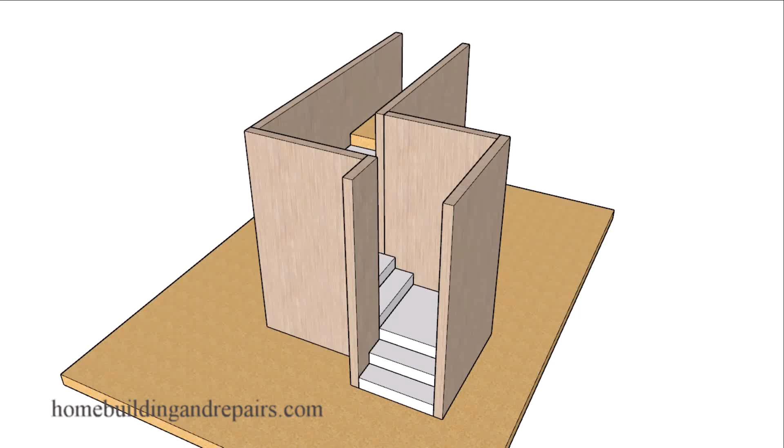In this video, I will provide you with a way that you might be able to use to figure out the overall total rise in a stairway that you cannot just simply grab a measuring tape and measure from the upper level to the lower level, because you might have other obstacles in the way preventing it. So let's go ahead and jump into this.

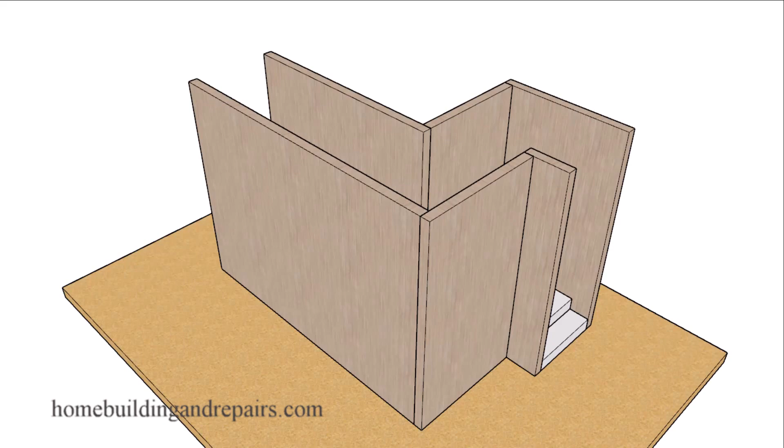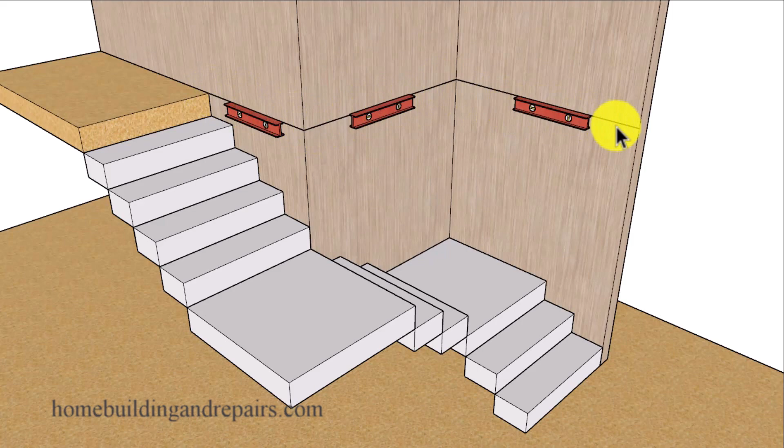The first thing you can do will be to simply grab a level and draw some level lines around the walls, if this will work for you. I'm not about to suggest that something like this will work all the time, because you don't want to have a line going all the way around your wall. And if that's the case, you might be fine with using a level and then just making a mark at the corner, a small mark that you might be able to remove.

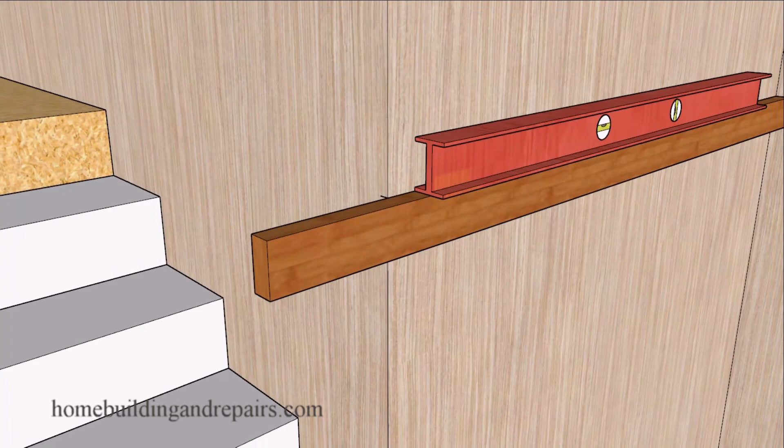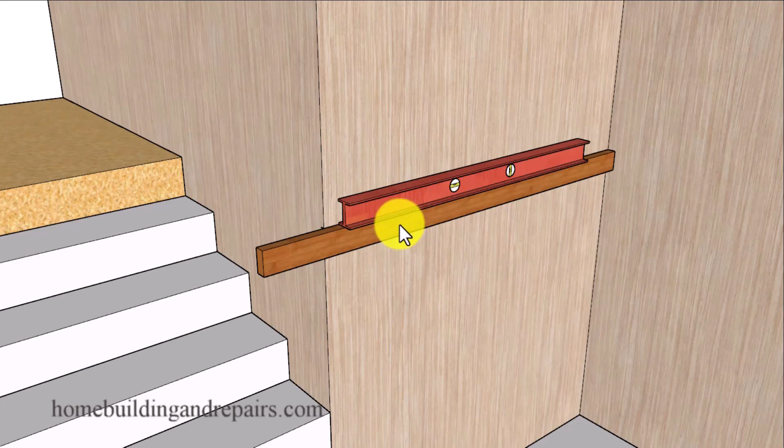And I've even made marks like this with a knife, just a little teeny slit that most people are never going to see. And if you need to use a straight edge, a straight board, because your level isn't long enough, then you can always use something like that also. Straight edge or a long board or a longer level. And again, you're going to end up doing the same thing, putting a mark in the other corner.

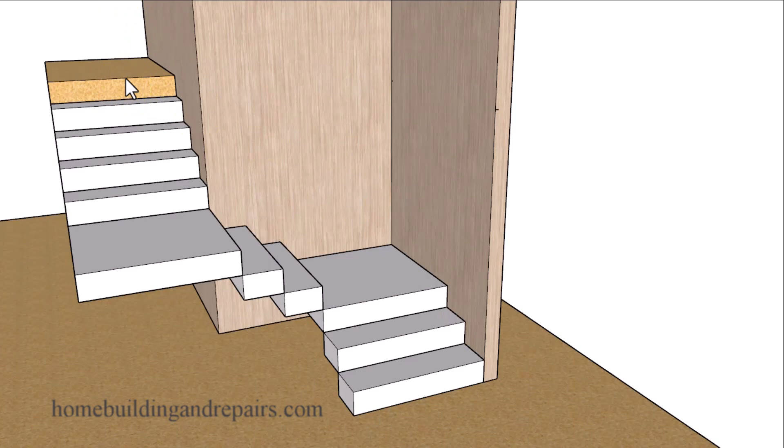And of course, from this point here, we will grab another straight edge and the level and then go ahead and make another mark. And this mark right here will be the mark we're going to use to figure out the total rise, or the difference between the lower level and the upper level. And of course, that method will work if you don't have carpeting. If you have carpeting, it could create another problem, and you might even have a difficult time figuring out the exact total rise, even if you use this method here.

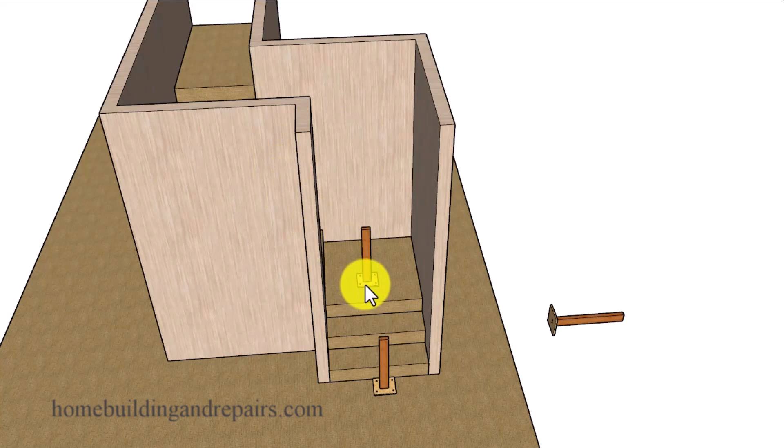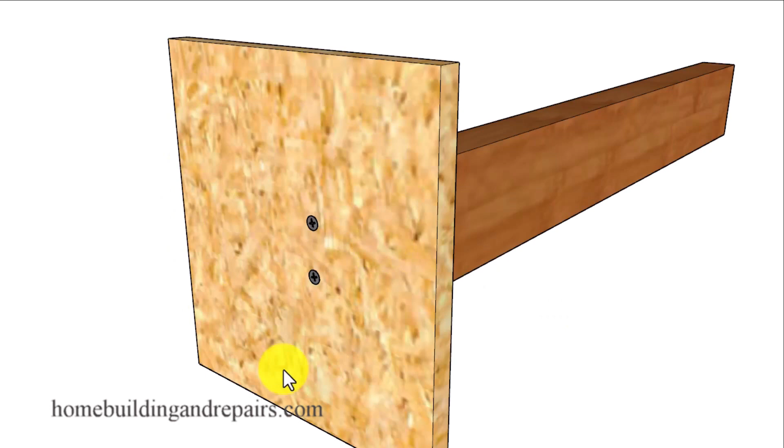So what I'm suggesting here is that you create some type of a component that you can attach to the carpeting, something that will provide you with a firm and secure attachment. And to do this, you could grab a scrap piece of plywood and then screw it into a 2x4 to create some type of a platform like this that can also be screwed and attached to the flooring. And I'll leave it up to you as to how many screws you use. Usually screws can go through the carpeting without creating any problems. However, if this is going to create a problem for you, then I don't suggest using this method.

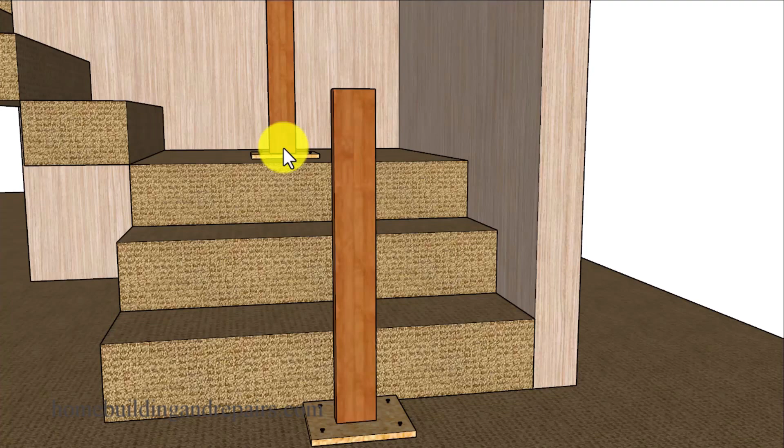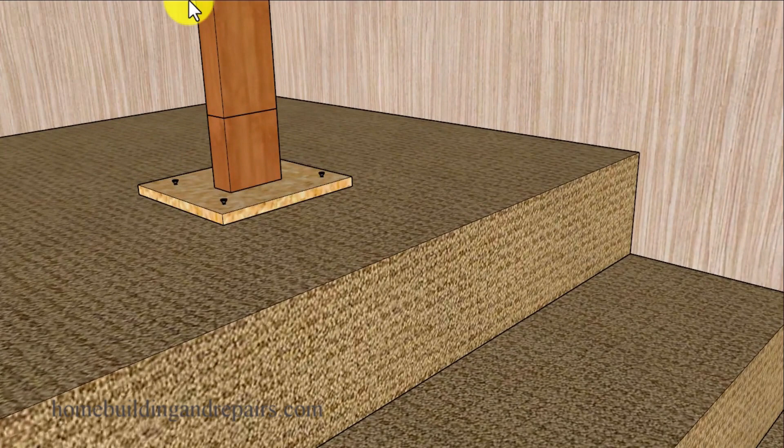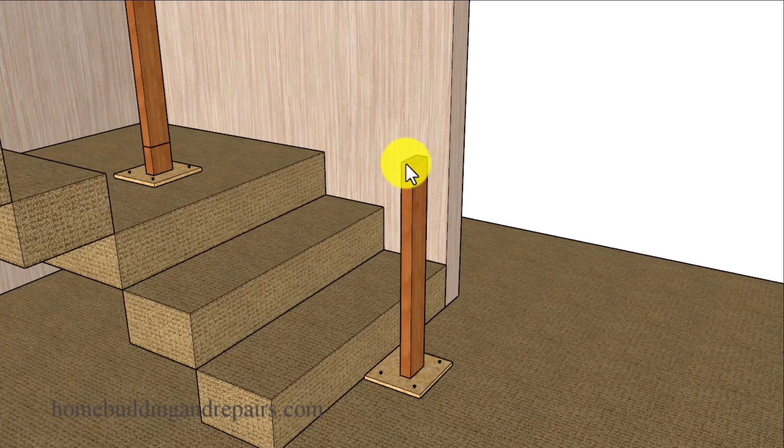And of course, all you need to do is have the 2x4s a little taller than the top of a landing or the next location that you're going to use, so that you can level across to create the first section of the total rise. And this mark can be anywhere here that is lower than the top of this 2x4 or this particular board. And you can always set the level on top of this board also. The main thing we're trying to do is create level sections that we can measure later.

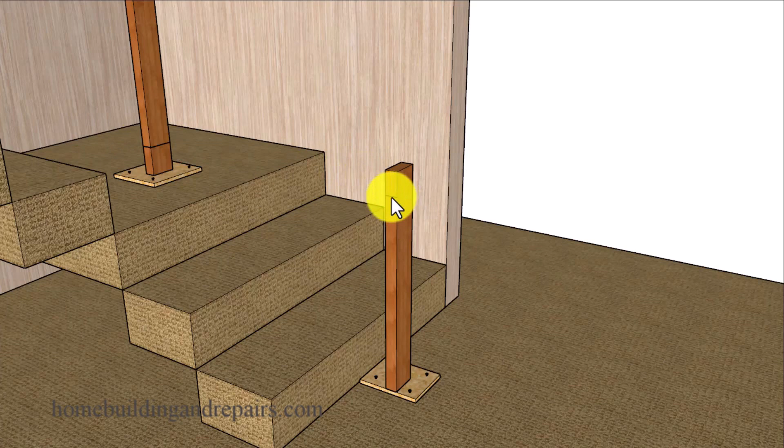So after we have created a level line here with our level, we can simply mark this 2x4 to create our first leg, or our first measurement line, and then simply work our way up the stairway. Like I said, you can put the level on top of it, or I could have this a little bit lower, just as long as I'm creating level sections that I will be able to measure later to figure out the overall total rise. And again, with carpeting and padding, you could end up with a small variation when figuring out the total rise.

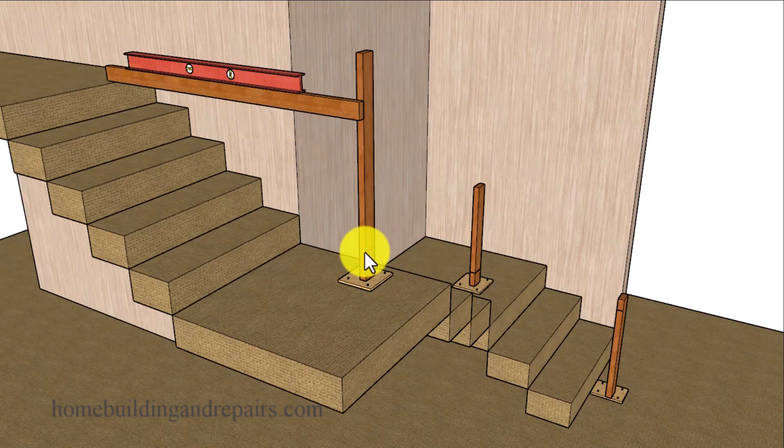And of course, all we're going to do here is measure from here to here, and then from here to here, and then from this point here to the top of the carpeting, and then add each one of these measurements together to figure out the total rise.

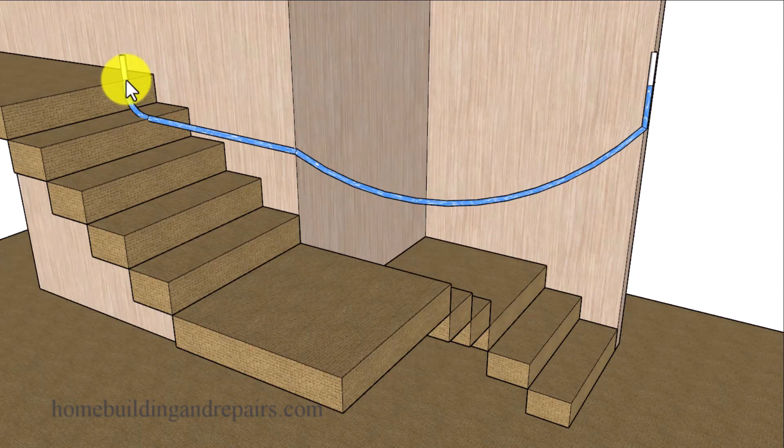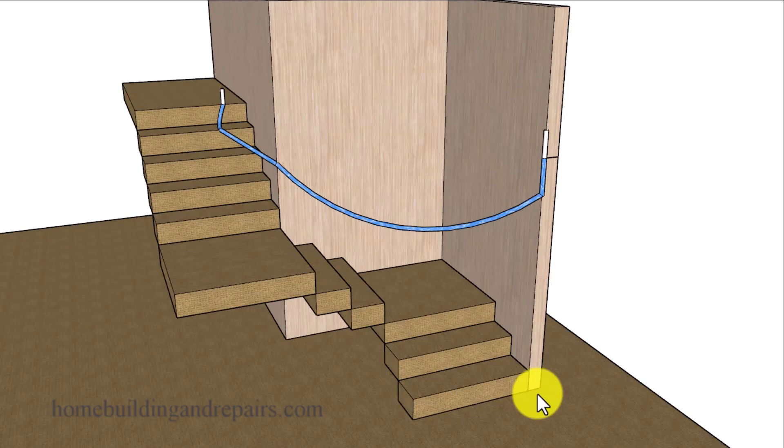And if you don't like either one of those ideas, you can create a water level and simply hold one end of the water level up, even or flush with the top of the flooring, and then simply work your way over to the other side where the water level can be marked, allowing you to measure from this point to figure out the overall total rise for your stairway. That can be used later to figure out the individual riser heights for each step.

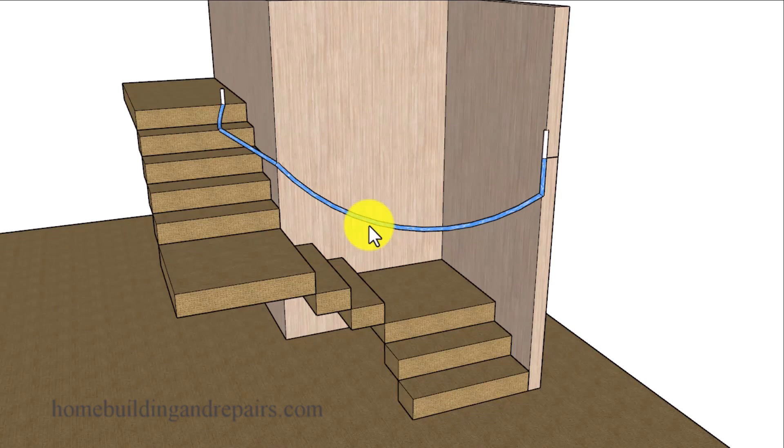And in my opinion, if you're looking for accuracy, something like this is probably going to provide you with the best method, especially if your levels are not perfectly level. So keep that in mind also. Check your levels to make sure they are working correctly before using them and finding out that you're a quarter of an inch, a half inch, or even an inch off when trying to figure the total rise for your stairway.